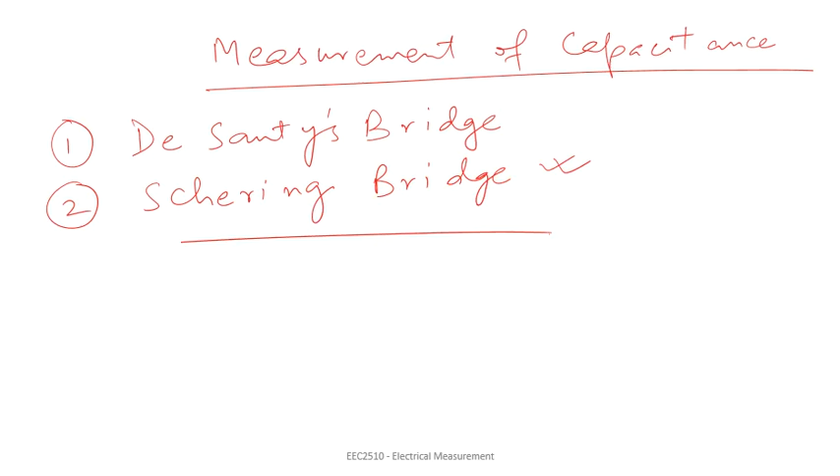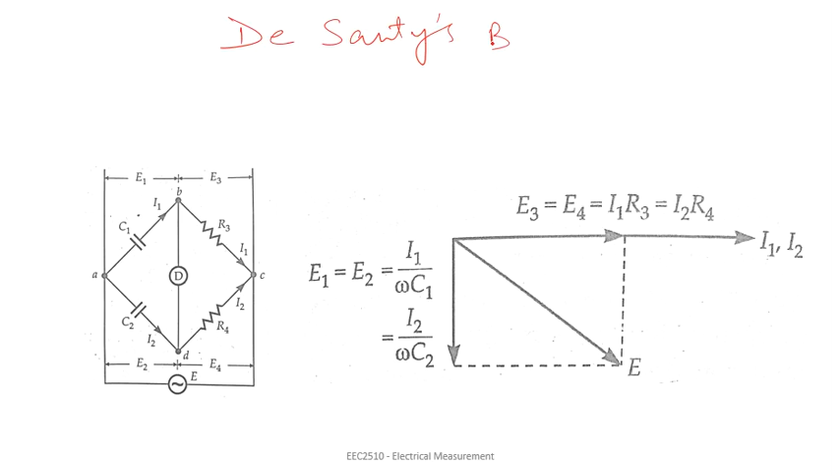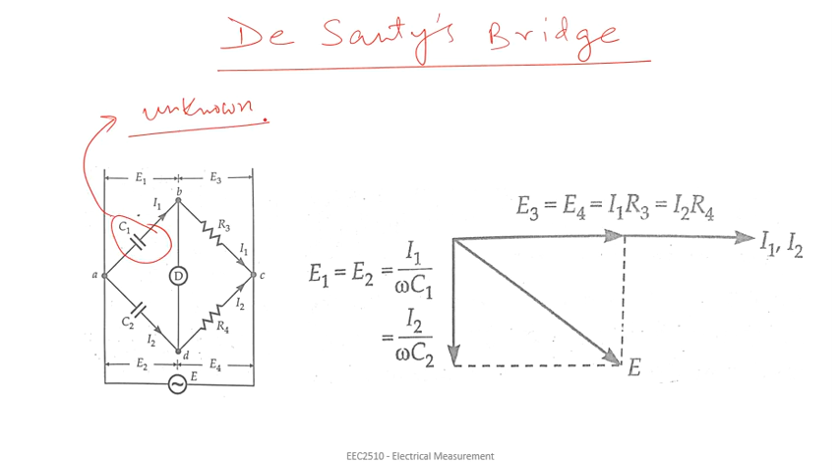Let us start with the first one, de Sauty's bridge. This is the circuit arrangement used in this method for determining capacitance, and it is a simple method of comparing two capacitances. This C1 is the unknown capacitor whose capacitance is to be measured, and this is a standard capacitor shown here as C2. These R3 and R4 are some fixed values of resistance.

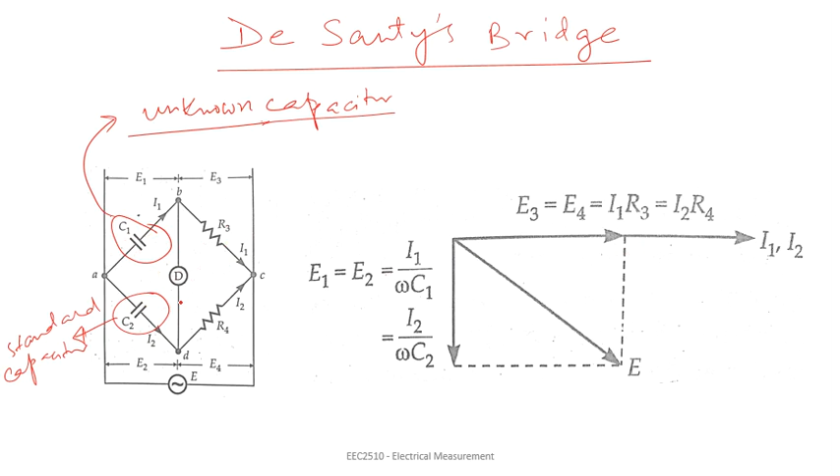This is its phasor diagram which can be obtained by the analysis of this circuit. Now we directly move on to the balance conditions of this bridge.

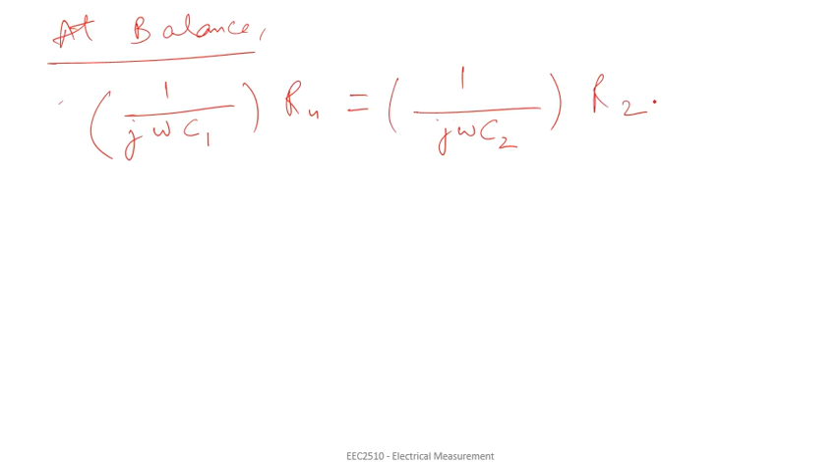So at balance, one upon j omega C1 times R4 will be equal to 1 upon j omega C2 multiplied by R3.

So from here you obtain the value of C1 as C2 R4 over R3. So this is the unknown capacitance which is measured in terms of the other known parameters in the circuit. This C2 is a standard capacitor, and these R3 and R4 represent the resistive arms.

Just by varying these resistances, R3 and R4, we can obtain the balance condition of the bridge, that is we can obtain the null deflection in the detector present in the middle arm. At that balance condition, whatever be the value of these resistances, with the help of those values you can obtain the value of the unknown capacitance.

So this is, you can say, the advantage of this bridge, its simplicity to obtain the unknown value of the capacitor. But there is also one condition, that the capacitors used in the circuit must be lossless, that is, there should not be any dielectric loss present in the capacitor.

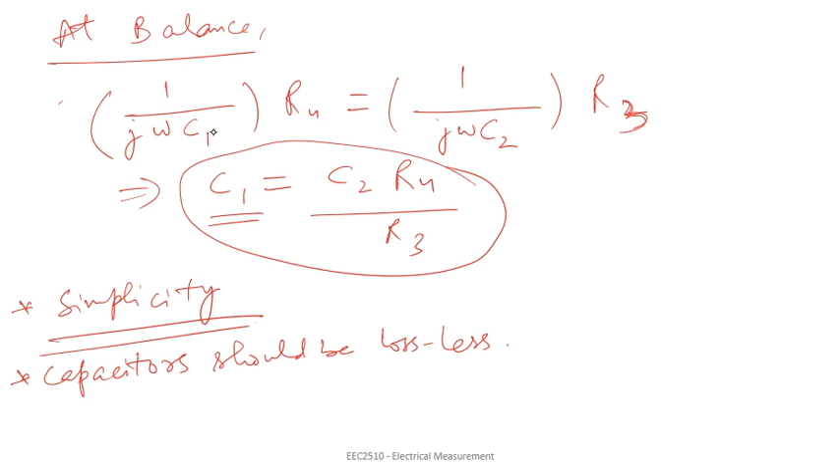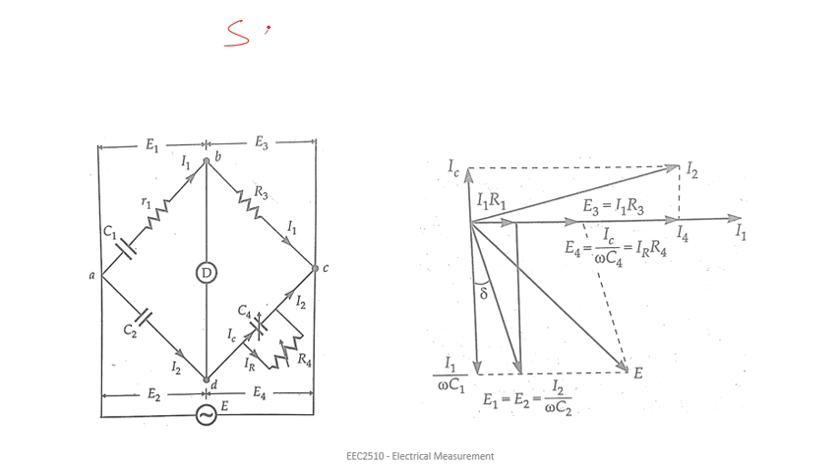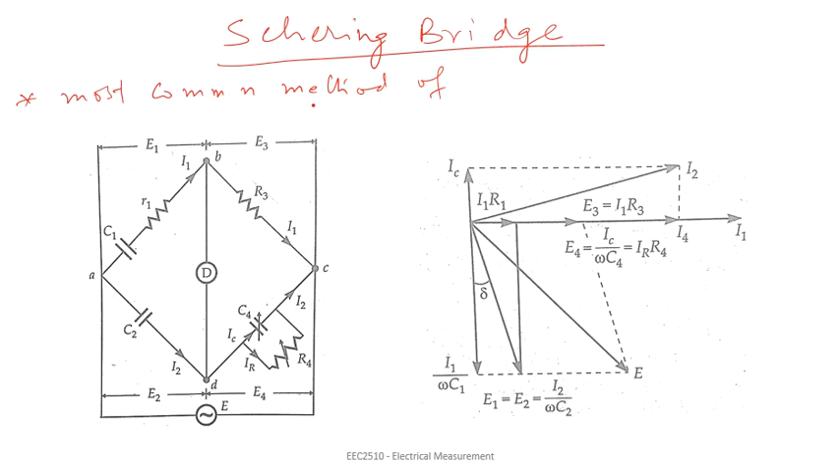Now for capacitors which include some dielectric losses, for those kind of capacitors we generally use this method, known as the Schering bridge. In any way, this Schering bridge is the most common method for measuring capacitance.

Again the circuit arrangement is being shown here. This is the circuit diagram, and this is the phasor diagram of the Schering bridge.

In this circuit arrangement, again C1 will remain the unknown capacitor whose capacitance is to be determined, and this small r1 which you see in series connection is a series resistance representing the loss present in this capacitor C1, so it is the loss component of this capacitor C1. This C2 will again be a standard capacitor with a fixed value. This R3 is a fixed, non-inductive resistance. C4 is a variable capacitor, and R4 is also a variable resistance connected in parallel with this variable capacitor. So these are the four different arms of this circuit.

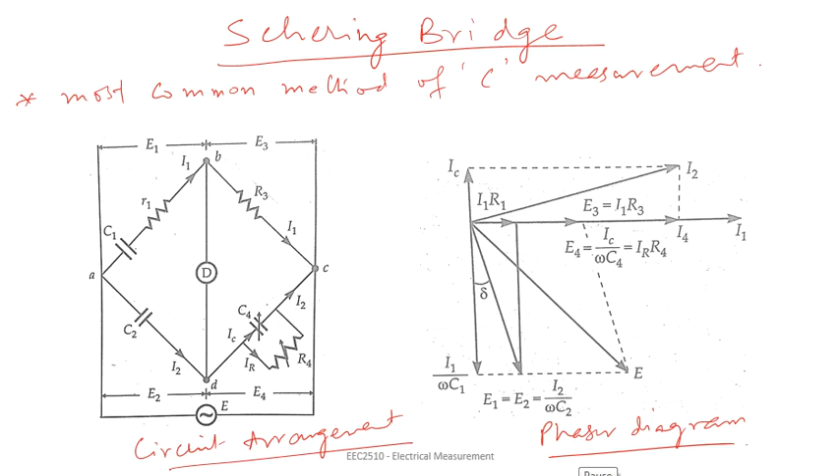Let us write the balance equations. At balance, R1 plus 1 over j omega C1 multiplied by R4 over 1 plus j omega C4 R4, equals to 1 over j omega C2 times R3. That is nothing but the product of Z1 Z4 equals the product of Z2 and Z3.

Let us simplify these equations. R1 plus 1 over j omega C1 will be equal to R3 over j omega C2 multiplied by 1 plus j omega C4 times R4.

From here, R1 R4 minus j times R4 by omega C1 will be equal to minus j times R3 over omega C2 plus R3 R4 C4 over C2.

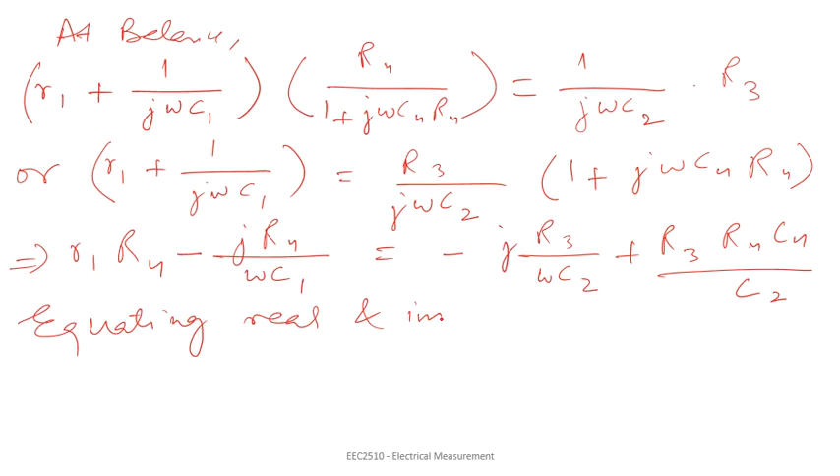So from here, if we equate the real and imaginary parts, we get R1 equals R3 C4 over C2.

And C1 will be equal to C2 times R4 over R3. So this C1 is the unknown value of the capacitance, and R1, which was the loss component present in this capacitor whose value is to be measured, represents that value.

Both these parameters come just by solving these balance equations. So these are the values of the unknown, and if you know the different values of C2 and C4, you can obtain these unknown values.

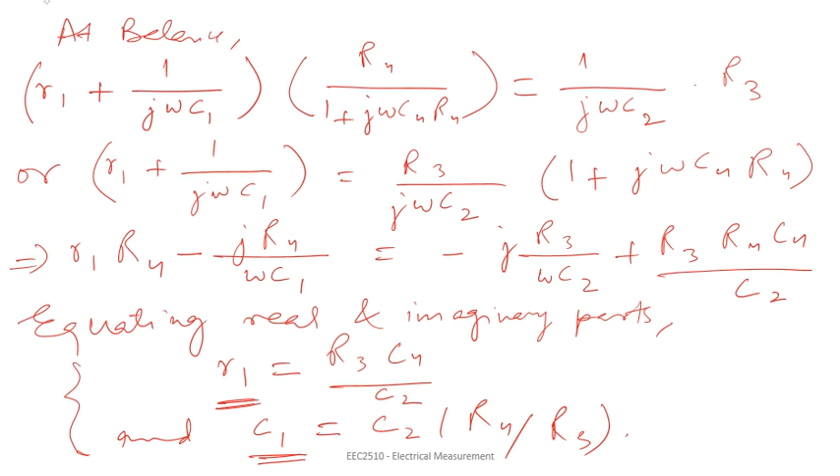The dissipation factor can also be calculated. The dissipation factor, represented by D, should be equal to omega C1 r1, using small r1 since we have represented that loss component by small r1. This is actually due to the loss component present in this unknown capacitor.

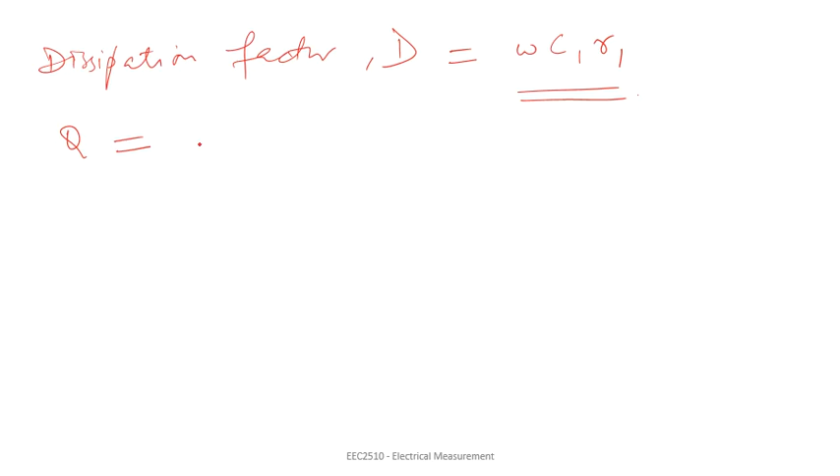One more thing we can see here is that we have also defined the Q factor to be the ratio of 1 over omega C1 R1. So this dissipation factor is just the reciprocal of this Q factor.

Therefore, the values of the unknown capacitance C1 and its dissipation factor are obtained from the values of the bridge elements at balance conditions. This was our objective, to find the value of the unknown capacitance along with the dissipation factor, and we are getting both of these from this Schering bridge.

The Schering bridge is, as I told in the beginning, the most common and popular form of bridge circuit used in the measurement of capacitances, although there can be other methods as well, but most commonly this method is used.

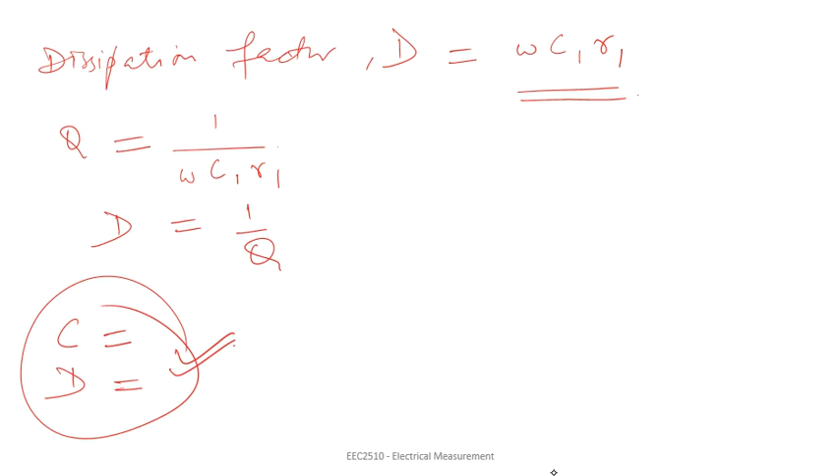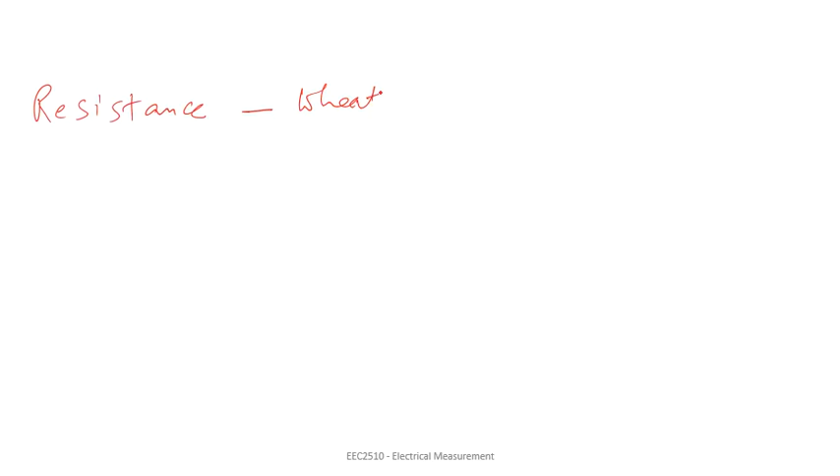Now, after discussing these bridge circuits for the measurement of capacitance, we have completed the different bridge circuits for the measurement of different parameters. We had seen that for measurement of resistance we discussed the conventional Wheatstone bridge, and along with it we discussed the Kelvin's double bridge as well.

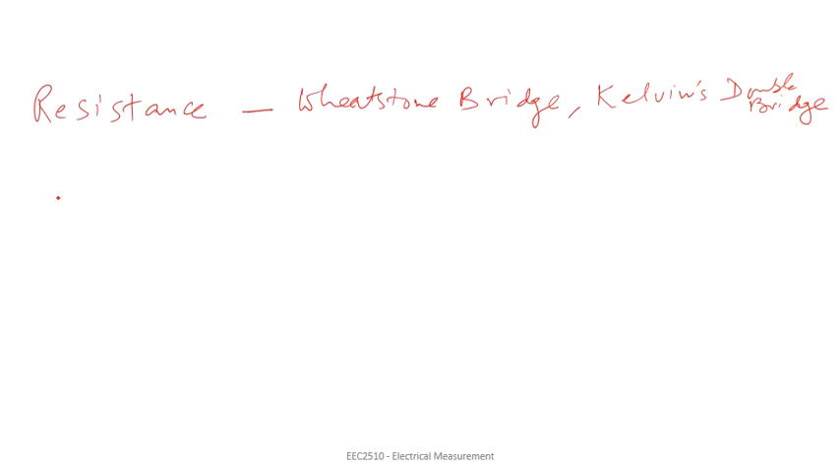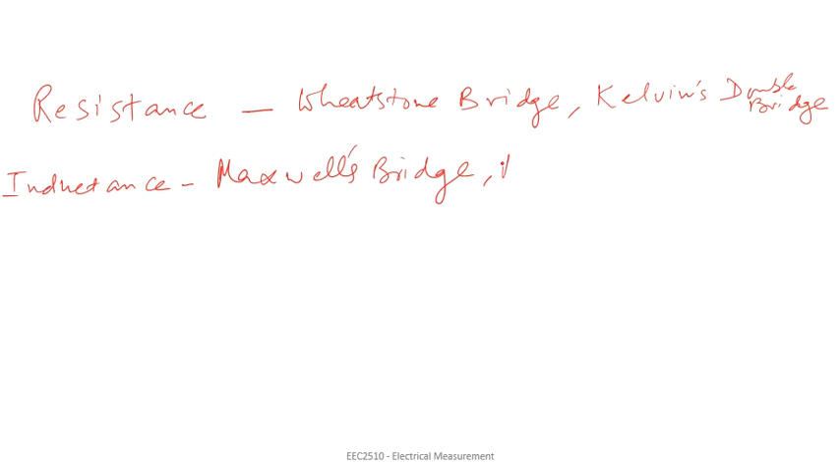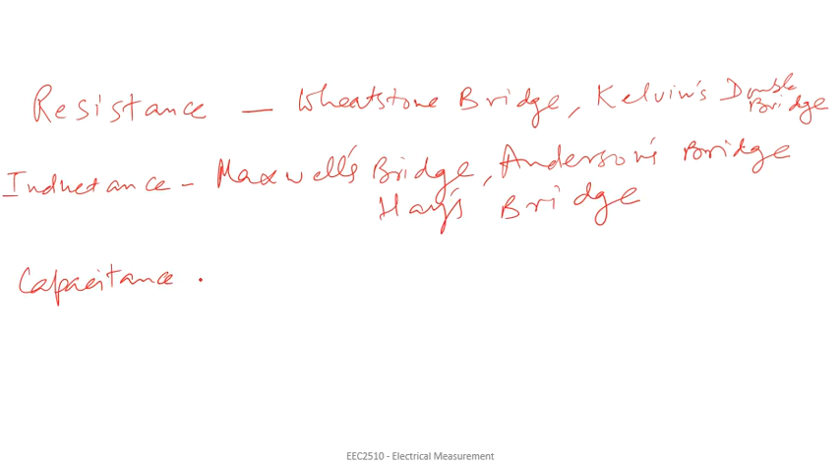So these are some of the bridge circuits which may be used for the measurement of different parameters like resistance, inductance and capacitance, although there can be certain other circuits possible as well, but most of the time these circuits are commonly used.